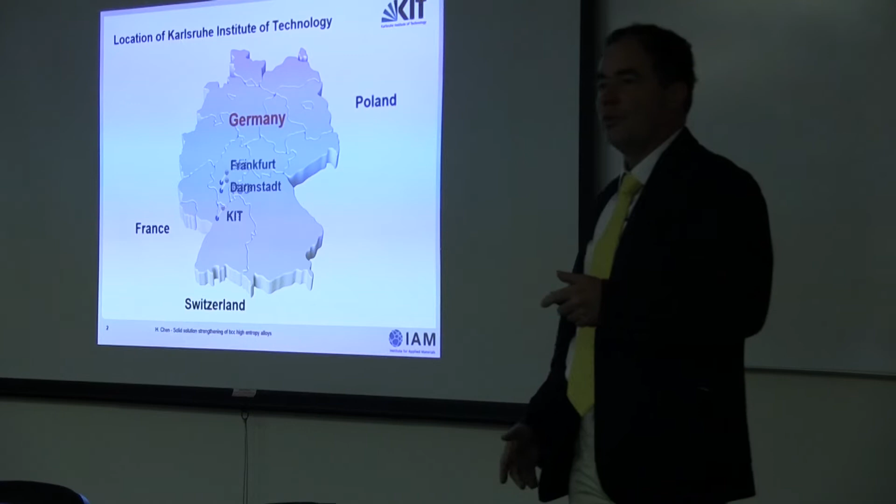Karlsruhe as a city has a population of about 250,000, or maybe 300,000 at most, depending on how you count it. So it's certainly much smaller than Ciudad Juárez here.

Now, Karlsruhe, KIT - Karlsruhe Institute of Technology - we did not carry this name until about 15 years ago, because we were formerly separate institutions: a university on one side, which is located downtown in the city. This is Karlsruhe.

And actually the castle is just on the edge here, on the edge of the campus. So if you once have the chance to come to Karlsruhe and stay overnight in the Gastdozentenhaus, the guest house for the scientific staff, you can have an easy walk to the castle, only about 200 meters away. It's very green and refreshing, a very quiet place. But on the other hand, you have the downtown area close by, also within walking distance.

And apart from that, we have a second institution which was independent of the university, the so-called Helmholtz Center. This was also briefly addressed. The Helmholtz Center, as you can see, is not far away, only 12 kilometers, but it's located in the woods. This has a simple reason.

About 30 years ago, Germany was still very much into nuclear power research, nuclear fission and nuclear fusion research. This was top secret at that time, which meant a research institute devoted to fission and fusion research had to be placed in some remote place where not much population is around. Meanwhile, this has changed, so you can just enter this site as well, like Manuel did many times, showing his passport, and then you get easy access.

Our total budget a couple of years ago was 861 million. This is very important. The funding is actually distributed into 3 big parts. The first part is from the federal government, which funds the Helmholtz Center - 30% of the 860 million, you can calculate this number, is only for research in a research institute.

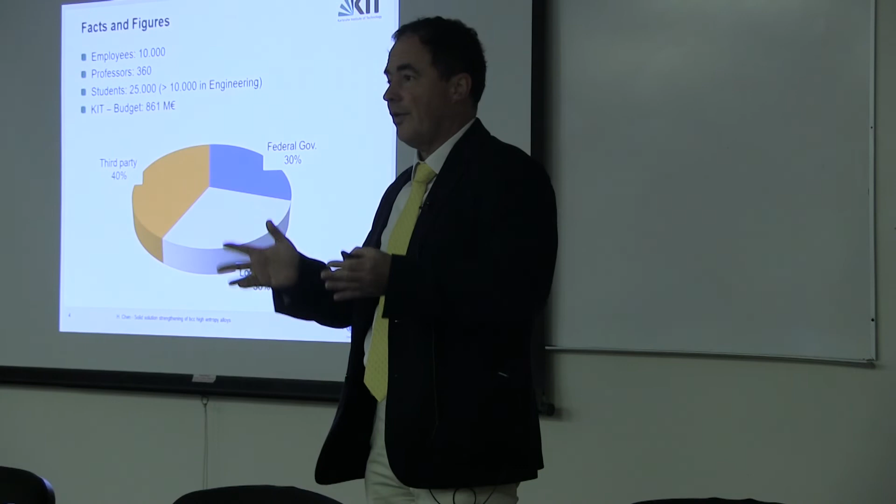Another 30% is for the university - this comes from the local state. In Germany, like in Mexico, all universities are funded by the local states, not the federal government. Both team up and add to this by raising third-party funding from various sources, industry as well as national science foundations, and these assume about 40% - quite a bit of a fraction of the total budget comes from third-party funding. That's why I think we are strong in fundamental as well as applied research.

And now coming to my talk itself. What is the motivation? This can be best described by this little sketch, showing the specific core power of a turbine engine. I'm working in high temperature structural materials, as the title suggests. This is the specific core power over the turbine inlet temperature. What you see here are dots representing certain metallic materials used at certain times of development, like in the 50s, 60s, 70s, and so on.

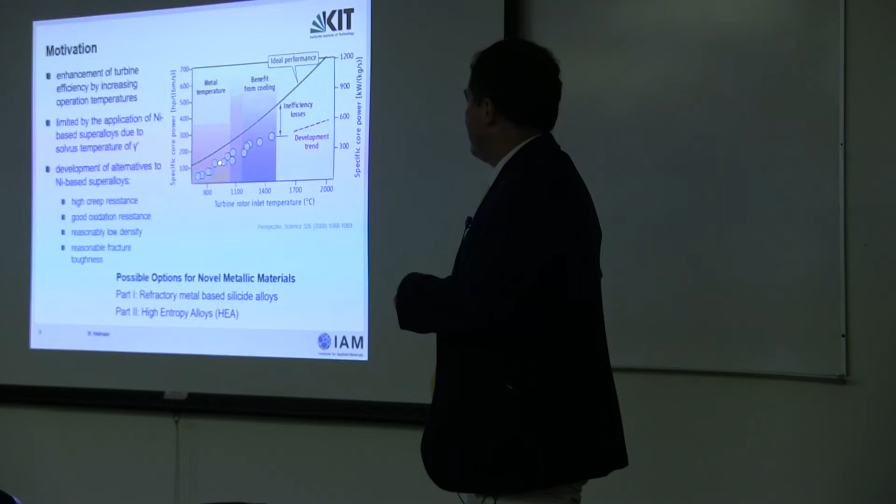What you can see is a demand for increasing the turbine inlet temperature by developing more advanced materials. But you can also see that we never reach the ideal performance, which some of you may know from textbook thermodynamics - this is the thermodynamic curve for a combustion engine. In fact, we observe that we don't get even closer to that gap; the gap actually opens, simply due to inefficiency losses - heat is wasted somewhere, and so on. No engine, as you know, we do not have perpetuum mobiles.

No engine works at 100% efficiency. The question is, how high is the efficiency, and how can we increase it? The development trend suggests that these inefficiency losses become greater as temperature increases.

This is simply due to one fact: the alloys we currently use, the nickel-based alloys, are limited by the Solvus temperature of the strengthening phase gamma prime, meaning we reach the maximum operation temperature of these alloys. We need to develop new materials, alternatives to nickel-based superalloys, with a much higher melting point.

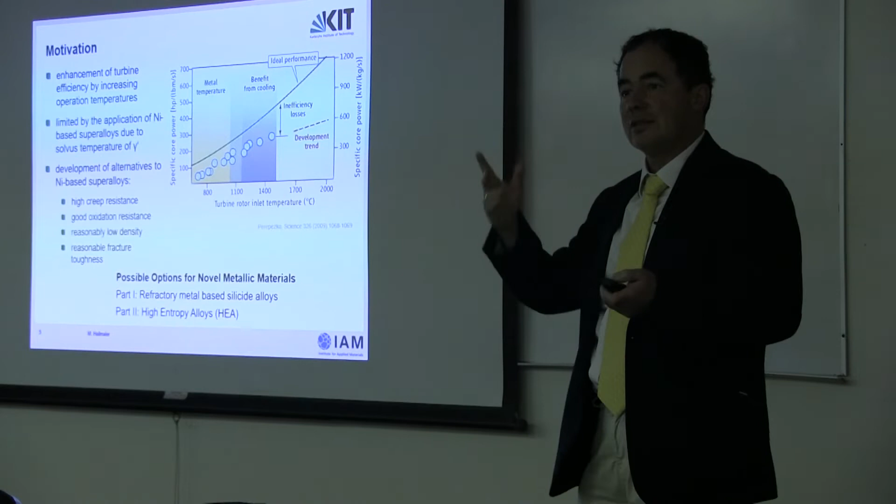In this Boeing 787 there's a really novel and the most innovative material in the aero engine, called titanium aluminides, a low weight material with a density of less than 4 grams per cubic centimeter, with a specific strength which exceeds that of nickel-based superalloys by a factor of 2 at best. Obviously, I arrived here safely, so this worked, right?

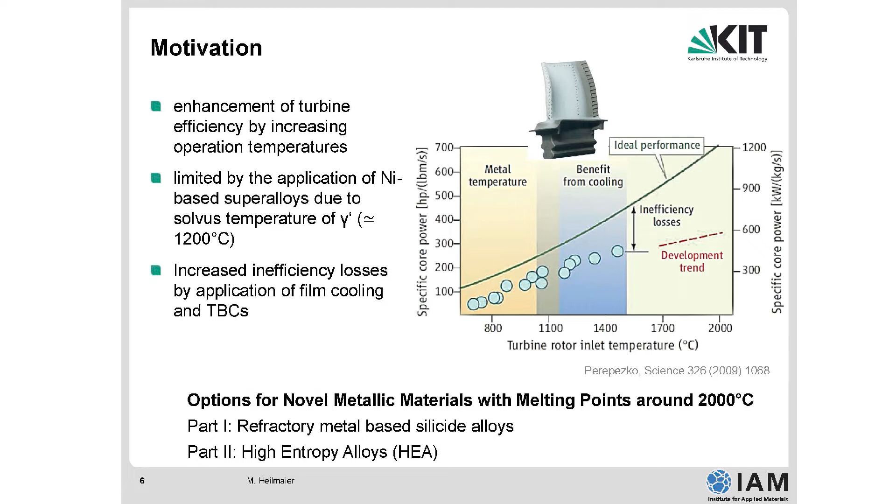And we now try to develop new options for these metallic materials with higher melting points than superalloys. I have split my presentation into 2 parts. The first part will focus on refractory metal silicide alloys. The second part on what we call high entropy alloys, a really novel research branch which hasn't been discovered until 10 years ago. Before I go into this, I will show you one slide on why nickel-based single crystal alloys are so good.

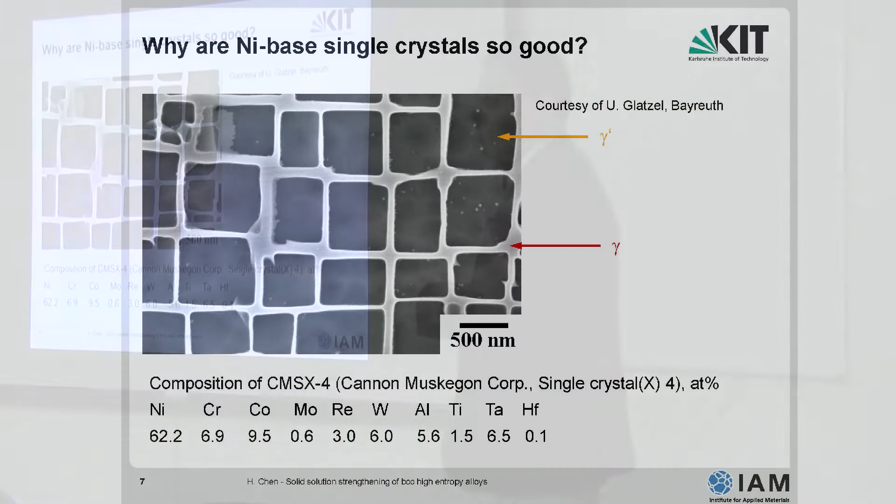And this is the answer to it. This is the micrograph, a TEM, transmission electron micrograph, of a nickel-based single crystalline alloy called CMSX4. CMSX4 stands for Cannon Muskegon Corporation Single Crystal number 4. They developed a series of alloy compositions—some were successful, some were not. The number 4 alloy with this chemical composition was extremely successful, and it now represents the state-of-the-art material in the hottest section of an aero engine.

Those of you who fly, no matter what kind of airline, no matter what kind of aero engine made by different manufacturers like General Electric, Rolls-Royce, Pratt & Whitney, to mention a few, will use significantly similar materials nowadays in the hottest section. But their strength is limited and kept up by this phase, which is called the gamma prime phase.

It's an ordered intermetallic phase embedded into a matrix of a disordered solid solution. Disordered solid solution means, for those who are not material scientists, that the atoms in the alloy are randomly placed on the lattice sites. There are no specific locations for specific atoms, which is different for the gamma prime phase.

Here you have 2 different atomic sites which are occupied by 2 different atoms. There's one site mainly occupied by nickel and chromium, and the other site mainly occupied by aluminum and titanium. I don't want to stress your knowledge on materials too much, so I'll leave it as it is now.

But I want to say one more thing about all these other chemical elements which have a definite task to fulfill. For example, molybdenum, rhenium, and tungsten are heavy elements, big atoms, and they strengthen the matrix—this little fine white area here—by solid solution strengthening. I will come back to that in part 2 of my lecture, for the high entropy alloys.

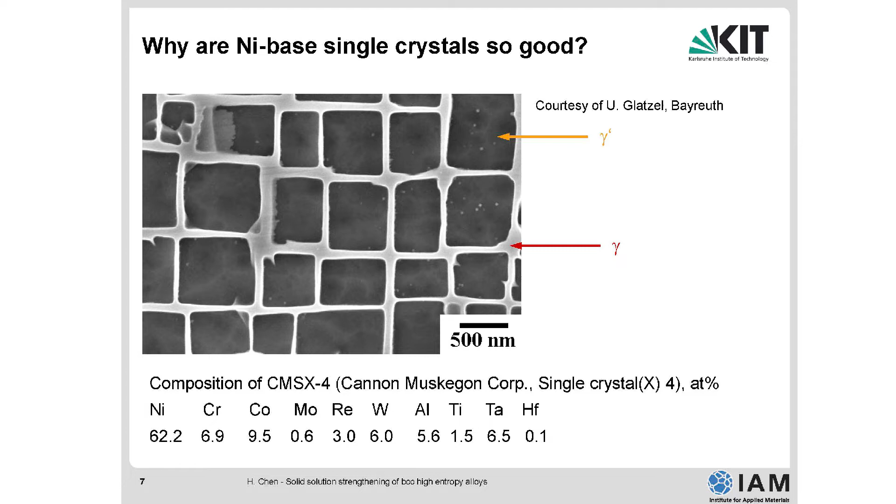So, keeping in mind, the take-home message here is: if this strengthening phase, the gamma prime phase, is gone, if it is dissolved at temperatures beyond, say roughly, 1200 degrees C, this material is no longer strong. It's weak, and therefore it cannot be used. If you want to go to higher temperatures to increase efficiency, you cannot make use of this alloy anymore. You need new alloys—that's the reason why I'm looking into alternatives to it.

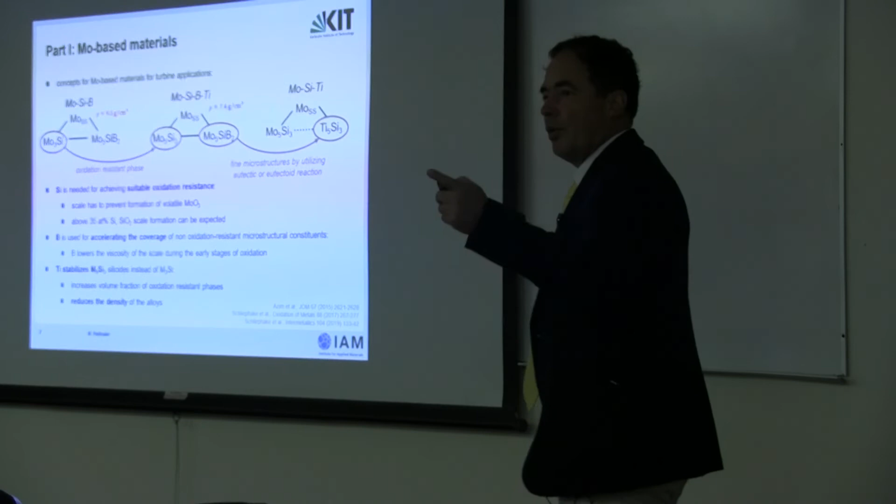So I'm coming to the first part. I apologize for the small letters here—you probably cannot read it in the back, but I'll just draw your attention to the most important issues. So what are the most important issues? First of all, these alloys have a high melting point. Molybdenum has a melting point as a pure element of over 2,600 degrees Celsius.

Having just said that nickel-based alloys have a temperature limit of 1,200 degrees Celsius, roughly speaking, this is much higher. Now, a pure molybdenum-based material would not work in a high-temperature environment because of the following issue. You need suitable oxidation resistance. If you don't have chemical elements in the alloy which provide oxidation resistance, the alloy would oxidize rapidly. You would form, in particular in this case, a volatile molybdenum trioxide which just sublimates and goes away. So you form smoke of molybdenum oxide which rapidly evaporates.

You need silicon to avoid this, but you need a high amount of silicon, above 35 atomic % silicon, to get a silica scale formation here, which is a lot. So we try to avoid this because this material becomes extremely brittle. What else could you do? You could add other elements to alleviate the fact that you need high silicon contents. For example, you could add boron. Boron is used for accelerating the coverage of the non-oxidation resistant microstructural constituents. Boron lowers the viscosity of the oxide scale which forms and thus provides rapid oxidation protection.

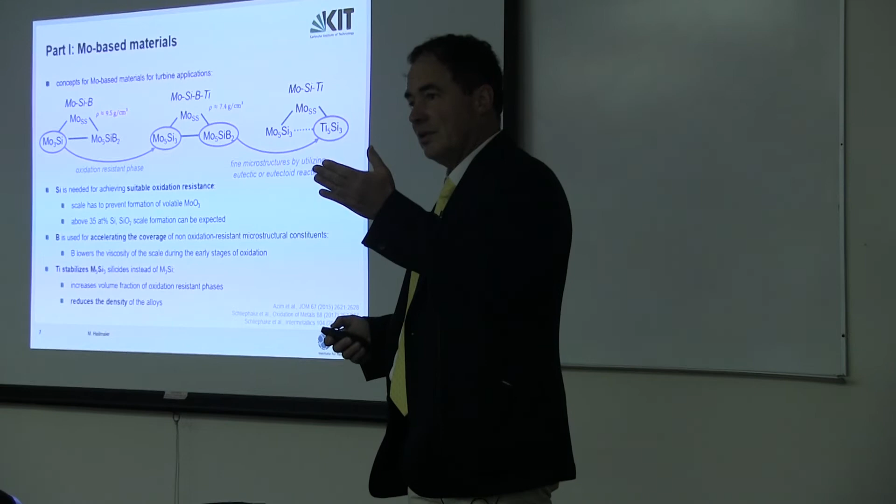But now there is a drawback here, again a small number. Rho, the specific density of the alloy, mass divided by volume, is 9.5 grams per cubic centimeter. This is beyond the density of nickel-based alloys, which roughly have a density of 8 grams per cubic centimeter. So you need to make the alloy lighter. This can be done by titanium, for example. Titanium addition also changes the phase formation somehow, but you can avoid this by playing around with the phase diagram. I don't show this slide here. But at the end, the density is down to 7.4, lower than nickel-based superalloys. So we have an alloy with potentially higher oxidation and creep resistance, mechanical strength at high temperature, but a lower density.

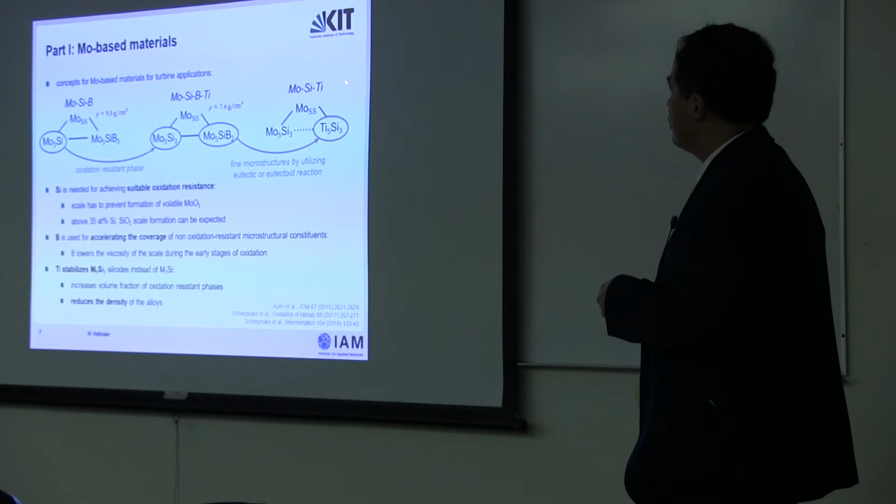Now you could ask yourself, why do you need the boron at all? This is what I will show you in the next few slides on this first part. Namely, you can still achieve good properties with a simple ternary alloy consisting of molybdenum, silicon, and titanium. The titanium, if you don't use the boron, stabilizes a different phase than this one here. This one is an oxidation-resistant phase, and it was an unsolved question in science whether this Ti5Si3 is good or not in the alloy. If you synthesize a pure Ti5Si3 phase, it would oxidize rapidly at temperatures beyond 1000 degrees. I will show you that this is surprisingly not the case for the alloy of interest here.

Okay, I have to bother you with one phase diagram at least. Maybe you see a second one. This is a melt projection of the ternary phase diagram between molybdenum, silicon, and titanium. When you look at the melt surface from the top, from very high temperatures, you see different lines here, which reflect reaction pathways in the alloy. We picked out two of the interesting ones. We don't want to go into very high silicon contents or low titanium and molybdenum contents, so we are interested in this part here. The green part gives you a eutectic reaction. Everybody should know what a eutectic reaction is.

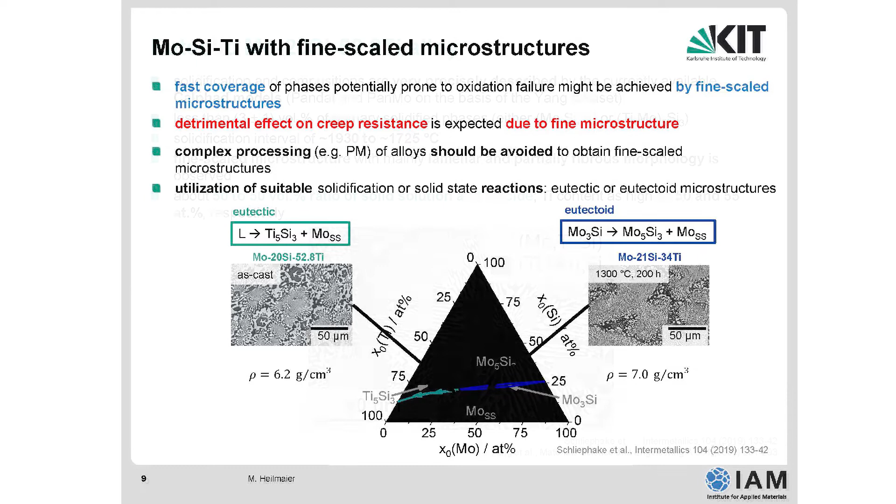Okay. So here in a larger magnification, the fine-scaled eutectic microstructure. This is the alloy composition. Those of you who have looked carefully would see all of a sudden, this is in atomic percent; all the concentrations I give are in atomic percent. If you would now calculate the molybdenum content, you would say, this is only about 30% molybdenum. Is this still considered a molybdenum alloy, or is it rather already a titanium alloy?

In terms of atomic numbers, it's a titanium alloy. In terms of weight, if I would calculate weight percent, it would be still a molybdenum alloy. And since we are doing casting, you know, all the metallurgical engineers talk in weight percent and not in atomic percent. So we can still say this is a molybdenum-based alloy.

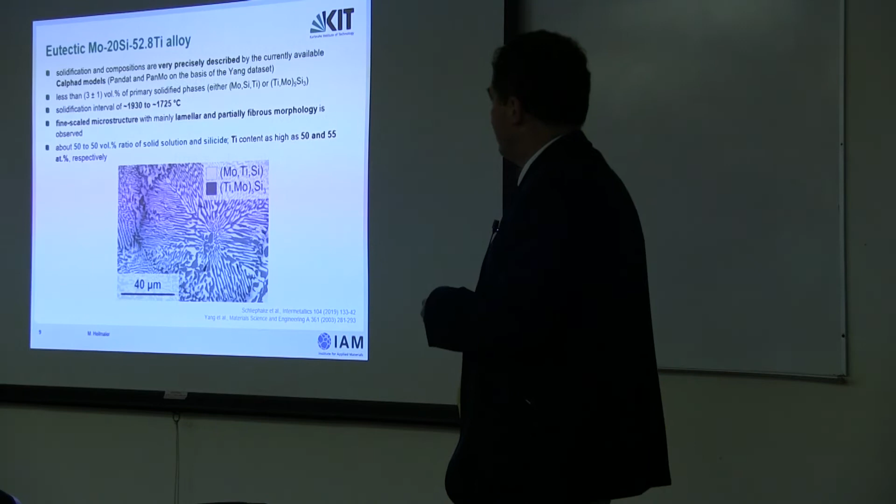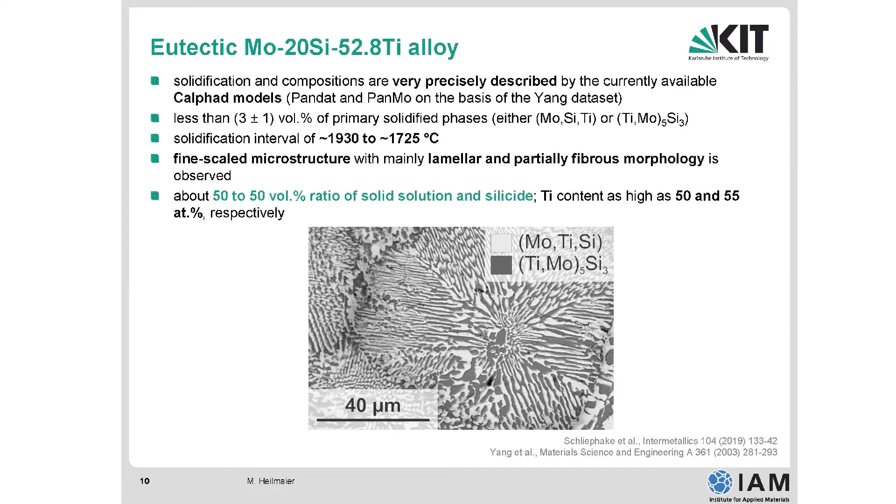And of course, the dark phase we determined by EDX and other methods is Ti5Si3 together with some molybdenum, which assumes titanium sites in the crystal structure. And the light phase is mostly molybdenum plus some titanium and silicon. Okay, so for the moment, keep that in mind. We have a very fine-scaled microstructure, and the question is, how does this fine-scaled microstructure perform at elevated temperatures with respect to creep and with respect to oxidation resistance?

Compared to that, the eutectoid alloy, you can see, has a much higher molybdenum content. Here, silicon plus titanium together is about 55, so that means 45 atomic percent is still molybdenum. And I said previously, at the beginning, this is the as-cast microstructure. The as-cast microstructure did not fully decompose into the thermodynamically stable phases. That's why we needed this 1300 degrees Celsius heat treatment.

Here you see this light gray phase. This is still Mo3Si, and you need to decompose this into the stable phases, the molybdenum solid solution and the Mo5Si3 phase, which has been done here. Of course, you note that there is some residual phase left, Ti5Si3 here, the very dark phase, but this is only to a minor content, 5.2.

Maybe we should not do the update here at the moment. Yeah, I wait. Yeah, don't worry.

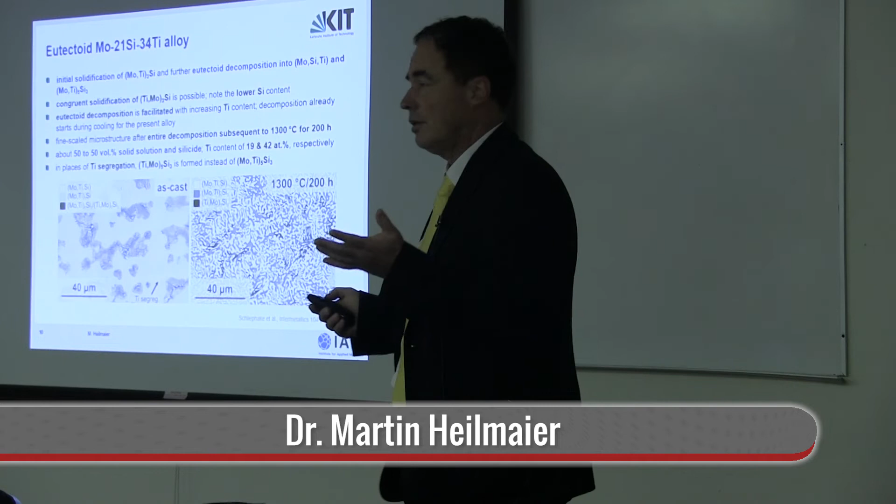Okay. So what you also can see here is that we have a mixture of about 50 to 50 volume% solid solution and silicide. So this material is a kind of a microcomposite, if you wish. Okay? Now, first I talk about oxidation, then I talk about creep. Oxidation is a major issue for these alloys because assume you have a metallic material, you put it in a furnace, and then you let it oxidize. The furnace operates like an aero engine without the rotational centrifugal forces.

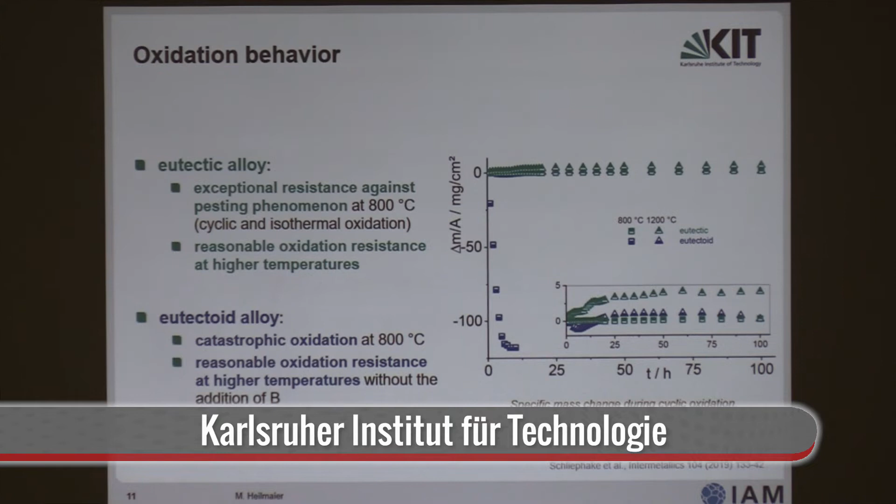So the metal is transformed into oxide. If all the metal is eaten up by forming oxides, you have a brittle material and your engine fails. So this should not occur. What this means is when I put this alloy in a furnace, and I have shown you two different temperatures: square is always 800, the green color is the eutectic alloy, the blue color is the eutectoid alloy. I have shown two different temperatures, 800 degrees Celsius and 1200 degrees Celsius.

And what you see here, the green alloy, the eutectic alloy, does not change its weight. Here is plotted the weight per surface area, delta M over A in milligrams per square centimeter. If the weight does not change, this is an indication for a very slow oxide formation at these temperatures, right? However, compared to that, here you see three curves plotted. Well, the third curve you cannot see because it's the eutectoid curve at 1200.

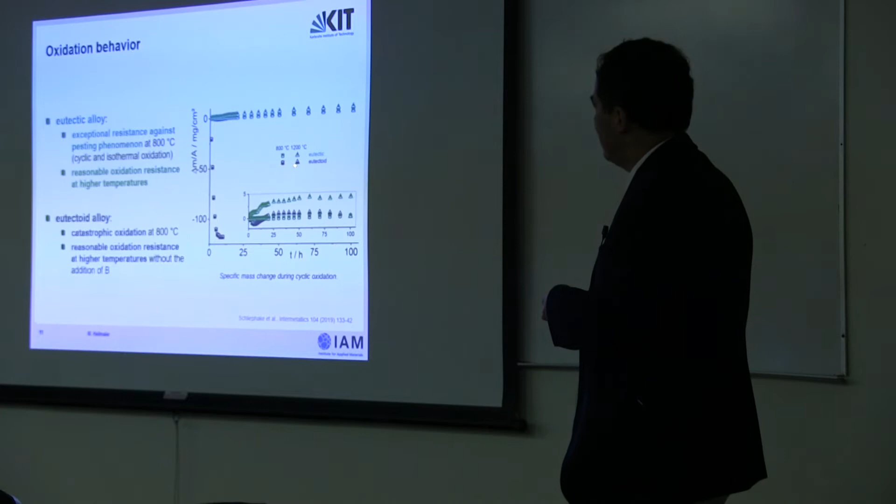It's actually underneath the other two, the eutectic alloy at 800 and 1200 degrees C. Basically what you see here, after 100 hours, not much has changed for the two temperatures of interest, and also for intermediate temperatures. But what you see is for the eutectoid alloy, this one here, the half-filled square symbols, this goes down rapidly, ending up down here with a dramatic weight loss.

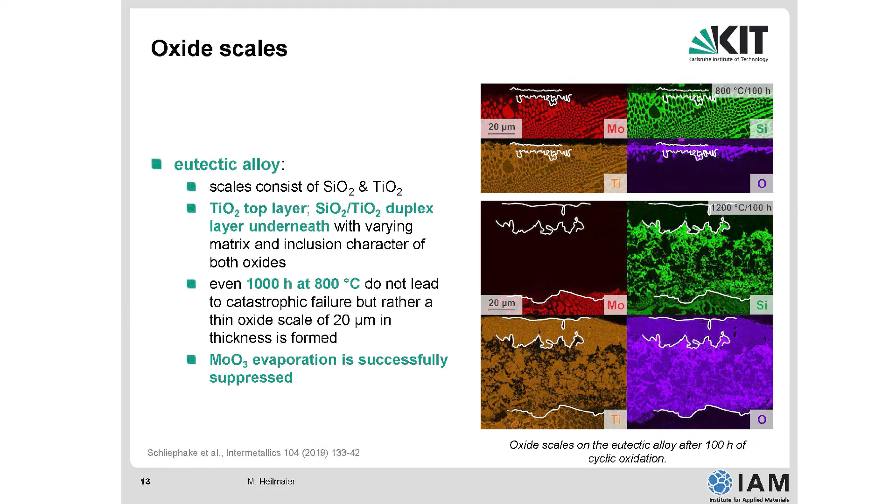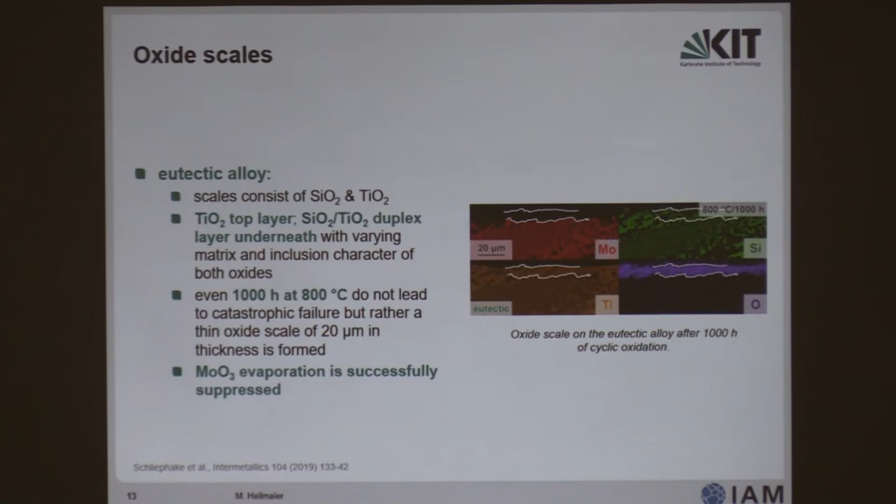Of course, you can also look at the 800 degrees Celsius oxide scale. It shows, again, protectiveness by forming these duplex scale layers. I don't want to go too much into detail. If you have any questions, I would be happy to answer them afterwards. Let me show you instead the creep behavior for these two alloys. And now, as always, a metal has two sides, right? On one side, it's shiny. On the other side, it's not so nice. The drawback of this eutectic alloy comes with the creep behavior.

And we plotted this on a log-log scale. So strain rate plotted versus stress means we want to have the material being down here on the right lower end. Right? So you can see that the blue curve, the eutectoid alloy, performs much better than the green curve, the eutectic alloy. And you can understand why this is the case.

Because in the green alloy, the Ti5Si3 intermetallic phase is the major phase, and the green alloy obviously performs similar to the monolithic intermetallic compound Ti5Si3. Whereas in the blue alloy, the molybdenum solid solution or the Mo5Si3 are the constituents of this alloy, and as you can see here, the blue alloy shows exactly the same creep behavior as the molybdenum and the Mo5Si3. So you can understand why one alloy is superior to the other. And that's the main issue of this slide here.

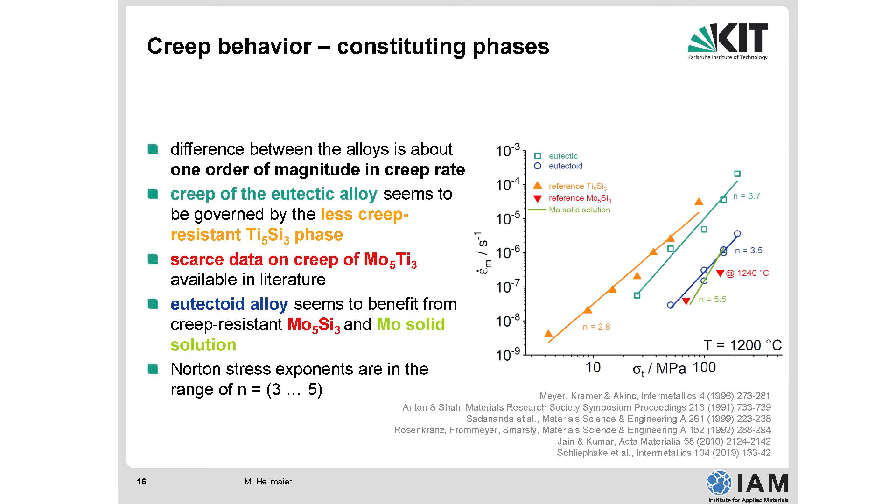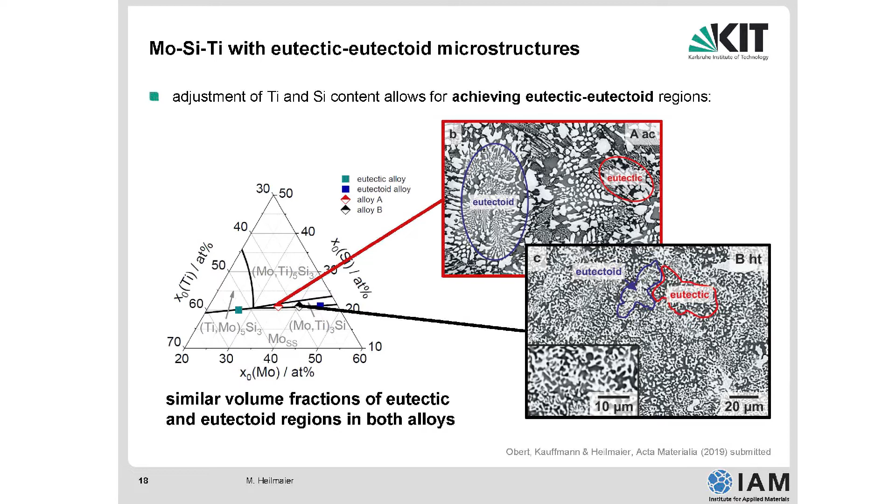Now you can stretch this a little further. I will keep that story short because I want to continue with my second part. You can, of course, walk along this decomposition line. Here you have got the eutectic alloy. Here is the eutectoid alloy. And I told you the eutectoid alloy would be stronger but not oxidation resistant. This is weaker but oxidation resistant. So maybe we can make a compromise and locate ourselves with alloy A and B in red and black somewhere in the middle between the eutectic decomposition and the eutectoid decomposition. And of course then the microstructure is composed of eutectoid regions and eutectic regions. I don't want to stretch these details here.

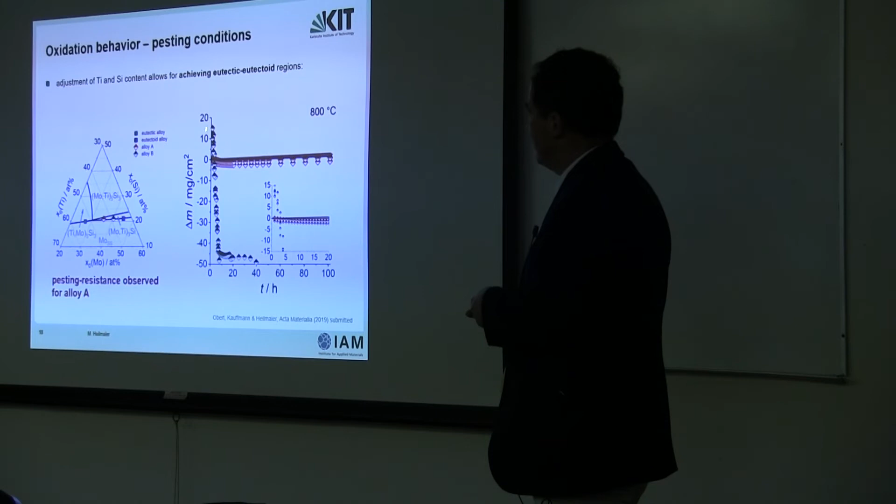Now let's look at the oxidation data again, because this is the initial proof. We want a non-pesting oxidation-resistant alloy. And to our surprise, we can afford some eutectoid regions still. This alloy here, alloy A, does not show pesting at 800 C. It still shows no weight change here, but the alloy with too many eutectoid areas in the microstructure does show pesting again. And the same behavior as previously was shown for 1200 C. We do not see any noticeable weight changes. These are all small numbers here. So the material is quite oxidation resistant at the highest temperatures.

But you can imagine a turbine has to be ramped up and cooled down. So you have to go through the 800 degrees centigrade region sooner or later with your alloy. So it doesn't help you having an alloy being oxidation resistant at 1200 C. At 800 it must show at least some oxidation resistance, because during start and landing the alloy will see this temperature. Okay, I skipped that for sake of simplicity.

We have done a simulation of how oxidation protection works in detail with the titania and the silica, and I do not want to go into detail, but believe me, this is just under revision in Acta Materialia. We provided a model for explaining why one material is oxidation resistant and the other is not.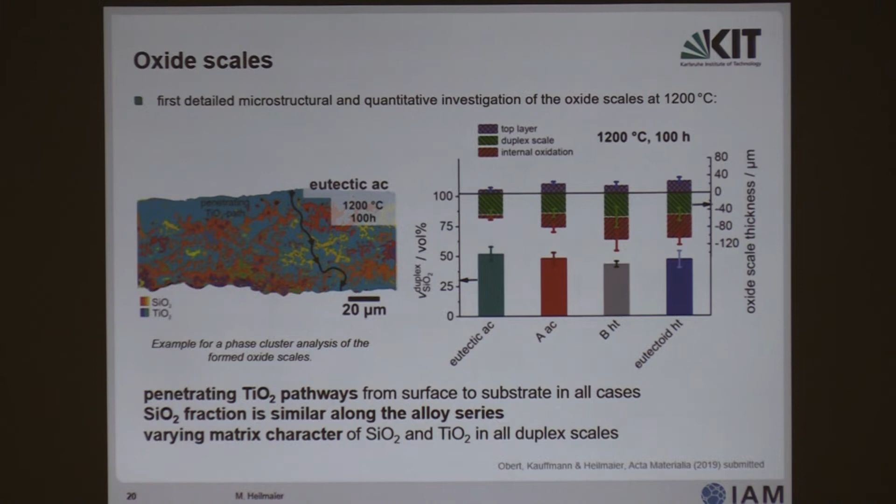I just want to skip these slides for the sake of time, and would like to address another point before I come to the second part of my lecture, namely, how can we explain the different creep behaviors in a more quantitative way for the eutectoid alloy, the eutectic alloy, and the new alloy A. So first of all, the new alloy A, as you can see, which is still oxidation resistant but contains eutectoid regions, shows a better creep performance than the eutectic alloy.

The reason why this is the case is very simple, because the melting points of all these alloys are different. The melting point of the eutectic alloy is lower than the melting point of the eutectoid alloy. And when I say melting point, I mean the point where the first phase starts to melt.

You know, of course, this is a melting range where the alloys start to melt. The melting point, in my definition, is the temperature where the first phase starts to melt. So we operate these alloys at different, what we call homologous temperatures. Homologous temperature is a normalized temperature, the actual temperature divided by the melting point. And of course, the comparison is only fair when you compare the alloys at homologous temperatures which are equal.

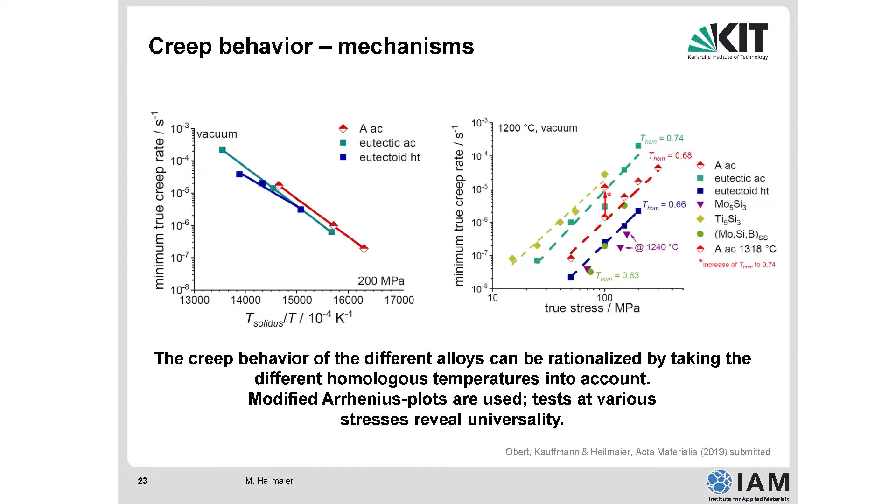Actually, the red alloy falls exactly on the line of the green eutectic alloy, meaning by definition the creep resistance is not different if you compare it in a physically related way, meaning at same normalized temperatures. The creep resistance, of course, is better when you let an alloy creep deform at a low absolute temperature with a high melting point.

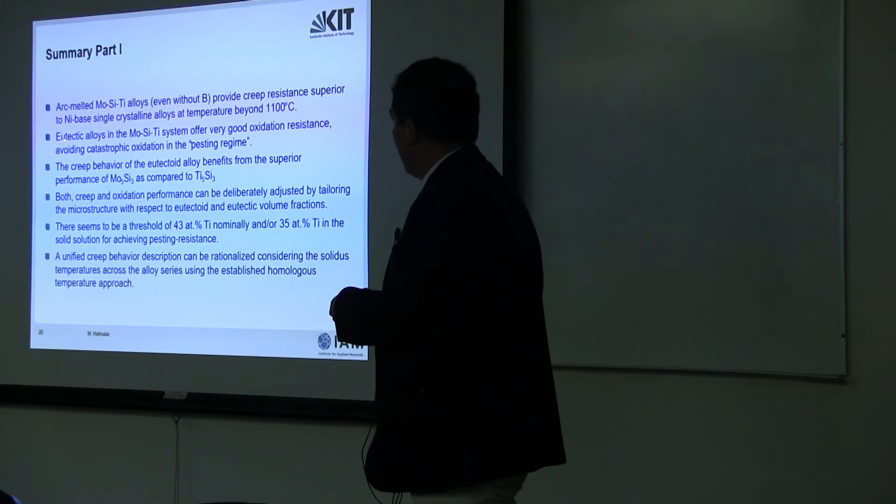Okay, so summary of part one. We did arc melting, so this is a simple process. We have polycrystals, no single crystals, like in the case of nickel-based superalloys. Nobody knows what happens when we try to melt single crystals, but polycrystals are simply arc melted. With or without boron, they provide creep resistance superior to nickel-based single crystalline alloys at temperatures beyond 1100 degrees Celsius. The eutectic alloys offer very good oxidation resistance. They avoid catastrophic oxidation in the pesting regime.

The creep behavior of the eutectoid alloy benefits from the superior performance of the Mo5Si3 phase as compared to Ti5Si3. And both creep and oxidation resistance can be deliberately adjusted depending on the alloy composition if I walk along the transformation line between eutectic decomposition and eutectoid decomposition. There seems to be a threshold, I didn't show this in detail, of 43 atomic percent nominally or 35 atomic percent in the solid solution for achieving pest resistance. You need a minimum titanium content to avoid pesting.

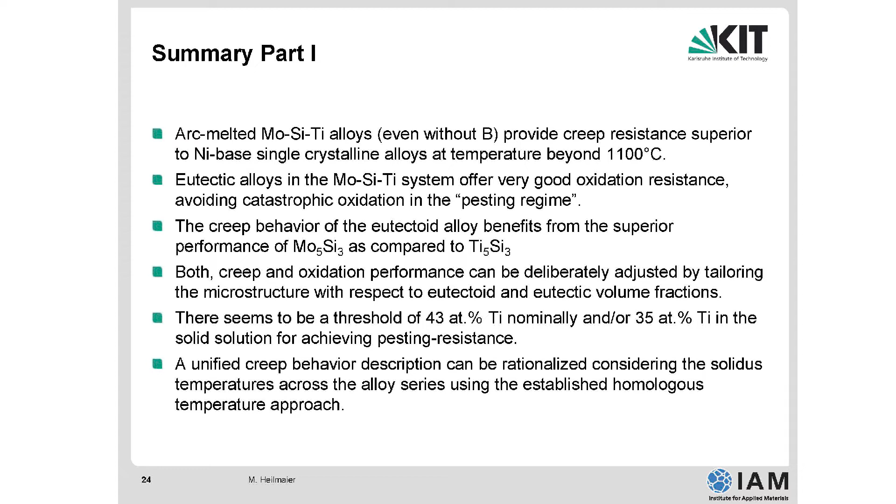That's what it says. And finally, you can describe the creep behavior by a unique and simple approach which relates the actual creep testing temperature to the melting point of the alloys. And this is the so-called homologous temperature approach.

Part 2, high entropy alloys. The concept, which is just a concept, this is not a theory, is very simple. The concept is that we get an increasing entropy contribution to the free enthalpy, delta G, for stabilizing disordered solid solutions with simple crystal structures if we increase this mixing entropy. So this is a basic thermodynamic principle. Free enthalpy G is enthalpy H minus temperature times entropy S.

Yeah? And the mixing entropy can be influenced strongly by what we call the so-called configurational entropy. Configurational entropy means taking different atoms in different concentrations and putting them randomly on lattice sites in the crystal. And this is the simple formula. I don't need to explain it. So the configurational entropy actually scales with the Boltzmann constant and with the number of alloying elements, right?

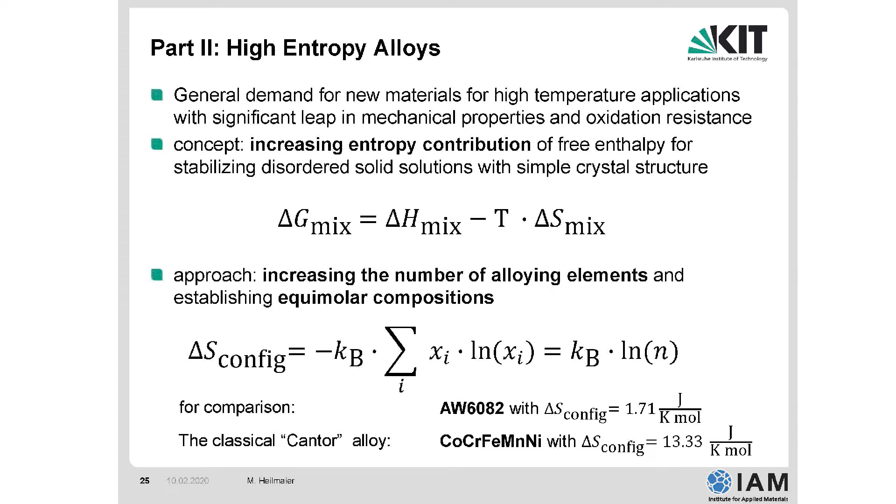So just a simple comparison, a classical aluminum alloy 6082, as some of you may know, has a configurational entropy of 1.7 joule per Kelvin mole. And what we call the classical Cantor alloy, this is a 5-component alloy in equal compositions, chromium, cobalt, iron, manganese, nickel, has a configurational entropy of 13 joule per Kelvin mole instead of 1.7, so a factor of 10 higher. Now let's see how this concept works.

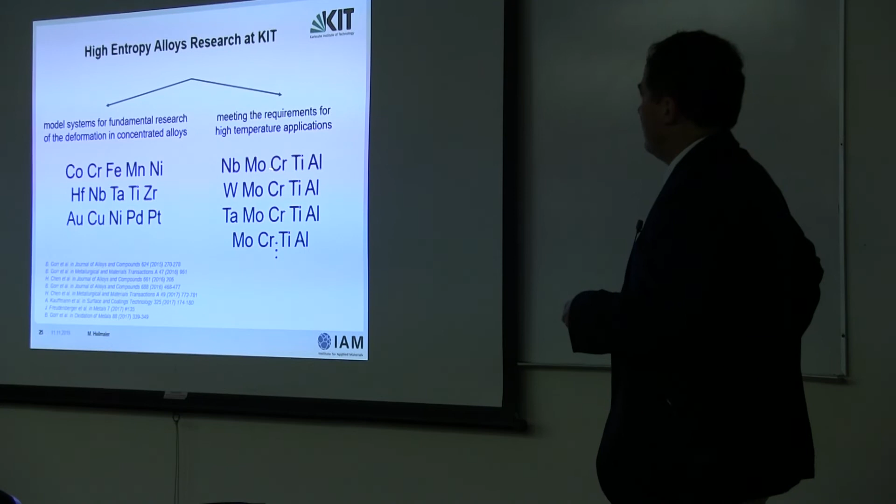So what we do at KIT is a number of different alloys. We have fundamental systems on this side. On this side, this is a face-centered cubic solid solution. This alloy is a body-centered cubic solid solution. This is a noble metal alloy, face-centered cubic solid solution. And this is some high-temperature alloys. You see all of a sudden here, again, the refractory metals show up again. Tungsten, molybdenum, tantalum, and so on. So I will look into this. I don't talk about this.

How much time do I have left? 15 minutes? Is that okay? Yeah? I can speed up a little bit if you want.

So the uniqueness of this approach is that we are not in the corners of a phase diagram. We are rather in the center of a phase diagram.

If you go into a corner of a phase diagram, then you have the classical alloys, like steel, where the major alloying element is iron, and you add a little bit of carbon, manganese, and so on. Here the approach is different: we are in the center of a ternary, or rather quasi-ternary, phase diagram.

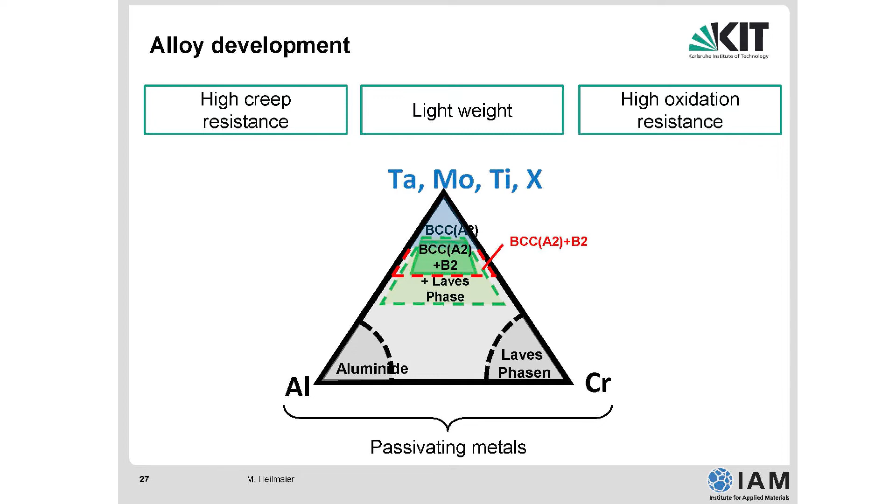Here we deliberately go into the middle and try to stabilize a solid solution, a single-phase solid solution. We are aiming for high creep resistance, lightweight, and high oxidation resistance. For high oxidation resistance, we go for the passivating elements aluminum and chromium, so we form an alumina or chromia scale which is oxidation protective. These alloys are for high temperature creep strength.

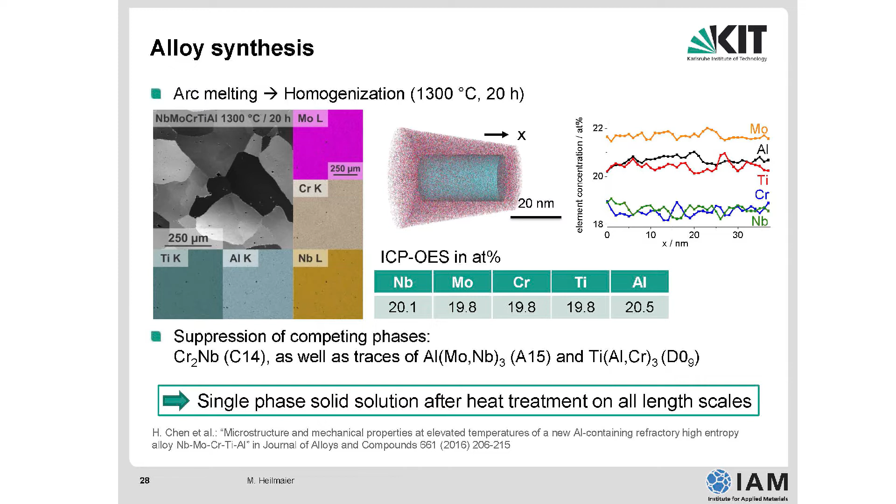So how do we do it? Again, arc melting, quite simple. Then homogenization treatment, and then we have to check the chemical homogeneity on various length scales. For example, overall chemical composition by ICP-OES indicates that the chemical composition is quite well met here for this quinary alloy system.

But we also check chemical composition on an atomic length scale, and this is what Manuel did with us, not in this case but in another case. This is atom probe tomography. Here you see the scale, 20 nanometers, and when you do the chemical analysis, you see that the elemental concentration is quite constant. It's a bit further away from each other than here, but it still scatters around 20 atomic percent. By doing so, we get a single-phase microstructure.

By suppressing the competing phases which are shown here.

What about the extended solid solution strengthening? Where does it come from? It comes from the fact that we mix on a random scale different atoms with different atomic sizes, and thereby we distort the lattice quite a bit. So lattice distortion is what counts in this system, in these concentrated systems, either BCC or FCC.

Of course, you have to measure the lattice distortion appropriately for predicting the solid solution strengthening. That's why we followed an experimental approach. We started from this model system, a 5-component system, and then deliberately varied either the niobium content—we took out niobium and ended up at the quaternary molybdenum, chromium, titanium, aluminum alloy—or on the other side we took out the chromium because we wanted to suppress this phase. The chromium-niobium phase is a Laves phase which is brittle and deteriorates the composition.

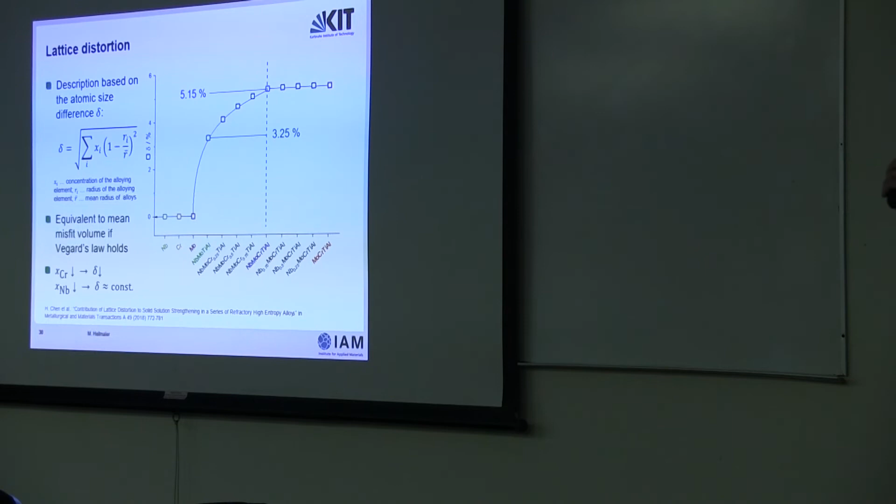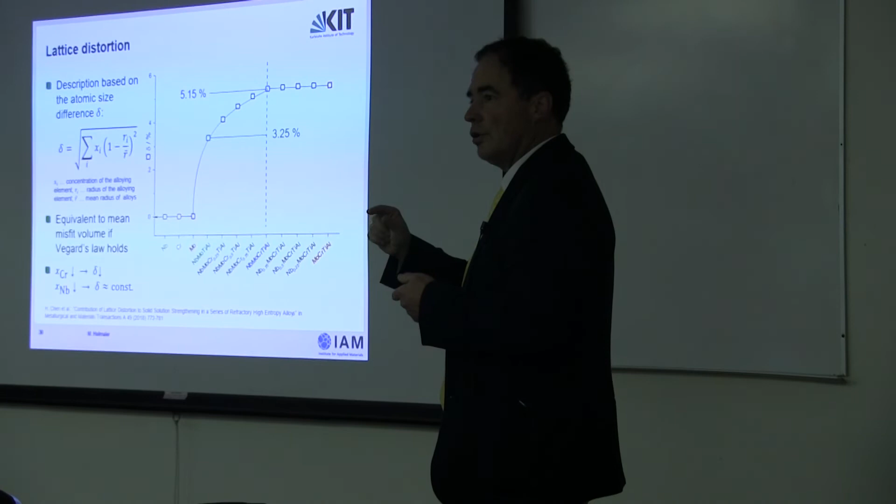So, just to give you a flavor of what we did—I don't want to go through the whole analysis—the atomic size difference is the measure for the lattice distortion. A high lattice distortion means I have atoms of largely different sizes in my solid solution. So the lattice distortion is proportional to the atomic size differences, and this can be simply calculated by this formula.

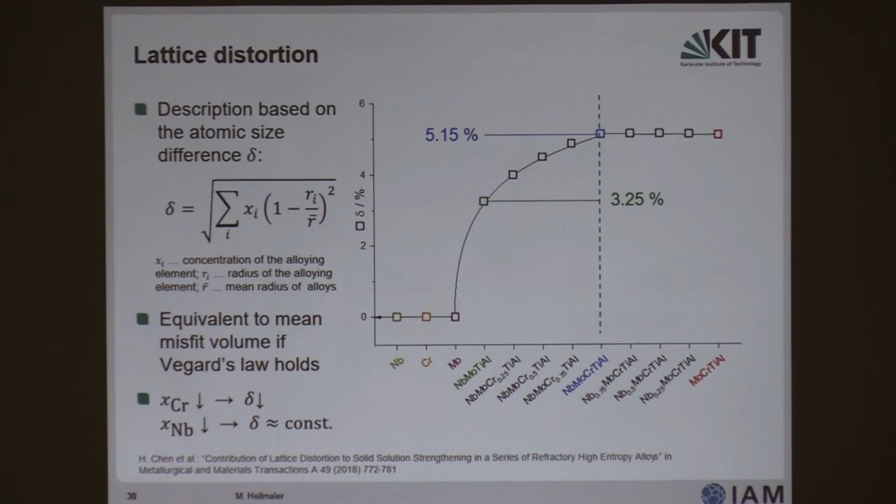Here is the average radius of the alloying element, and here is the mean radius for all the alloying elements in the alloy. This is simply summed up and then the square root is taken. What you see here is, of course, no lattice distortion in the pure elements, so this is 0. But the lattice distortion goes up quite a bit, up to 5%. 5% is a huge lattice distortion for a solid solution strengthened alloy. Imagine, for example, brass, copper-zinc, much lower, or aluminum-copper, much lower.

But we want to develop high-temperature alloys, so what about oxidation resistance? Here I've shown you mass change at 1100°C for these two alloys. The niobium alloy is not so promising, but the tantalum alloy—tantalum, molybdenum, chromium, titanium, aluminum—shows very low mass changes at 1100°C. So this should be of interest for further development.

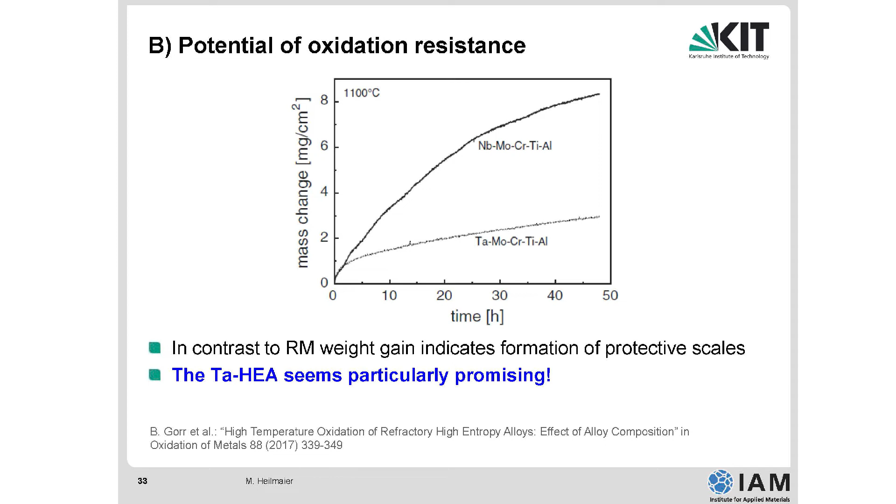First of all, you have to make the alloy with equiaxed coarse-grained grains. You should check again chemical composition and chemical homogeneity.

We have done this. I can skip this.

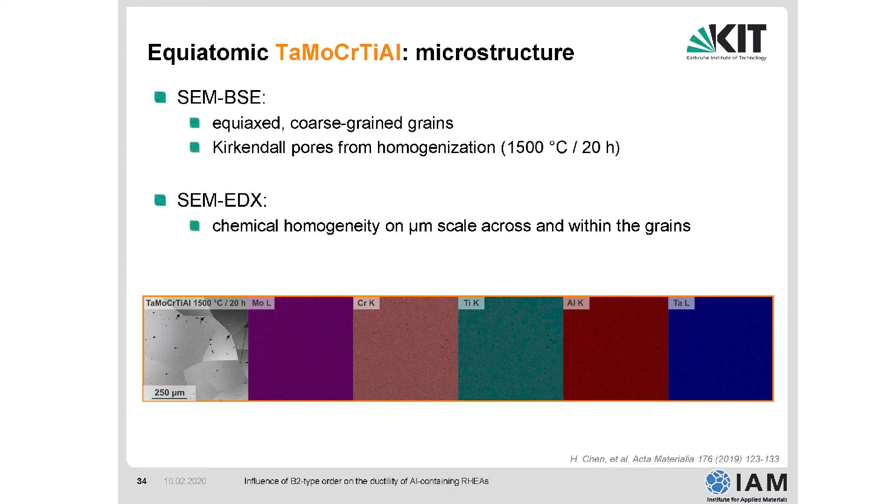Because of the tantalum and chromium inside, we do get a hexagonal Laves phase again. This is chromium-2-tantalum in this case, and you can see it here as nice little bright spots on the grain boundaries.

This brittle phase on a grain boundary is not good for structural materials, because if you want to plastically deform it, it would fail. I will show you an example for that in a minute.

Now, is this really an A2, meaning a disordered solid solution, A2 crystal structure? No, it's not. As you see here, you have tiny little reflections here and there. Here you have some indications of B2 structure.

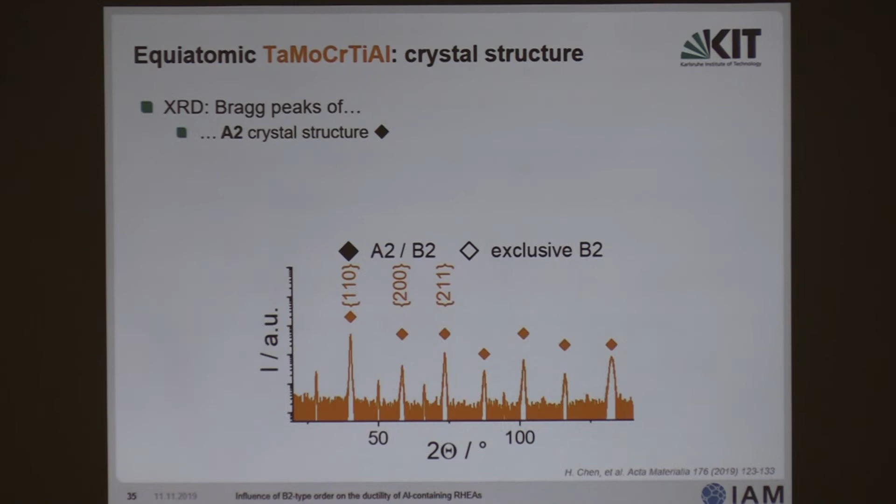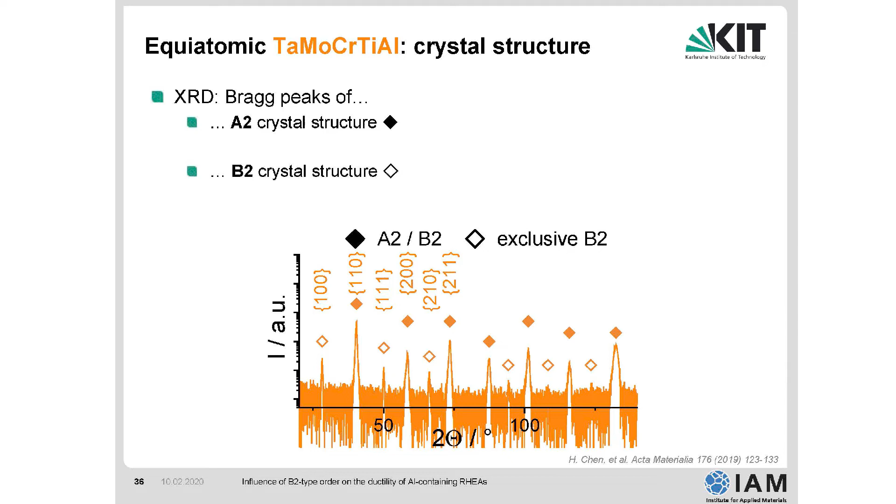So we do have B2 super lattice reflections, meaning we do not have random distribution of atoms, but some of the atoms take one atomic site and other atoms take another atomic site, preferentially.

So it's totally brittle below 1000 degrees C. The reason we guess is we have to avoid this Laves phase at the grain boundaries. I will show you briefly in the last 5 minutes how we tried to accomplish it.

So we started first with taking out the tantalum completely. No tantalum should mean no Laves phase, right? Because chromium-2-tantalum is the Laves phase. Again, this alloy is single phase.

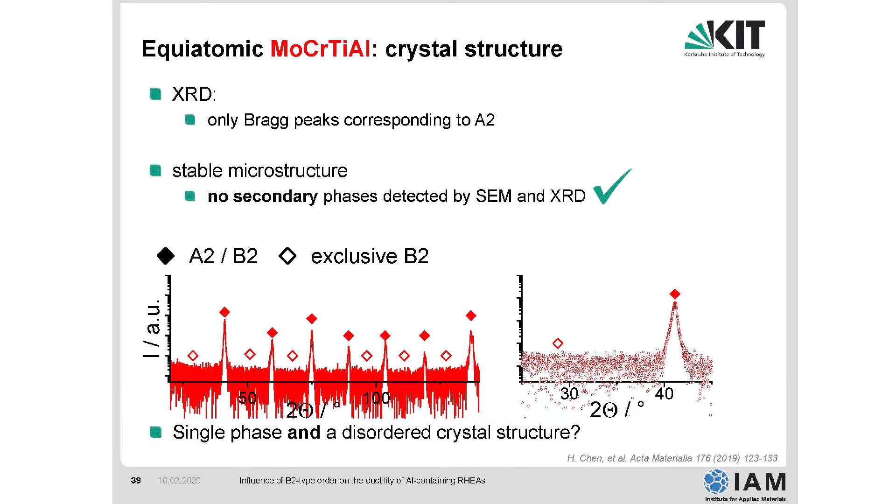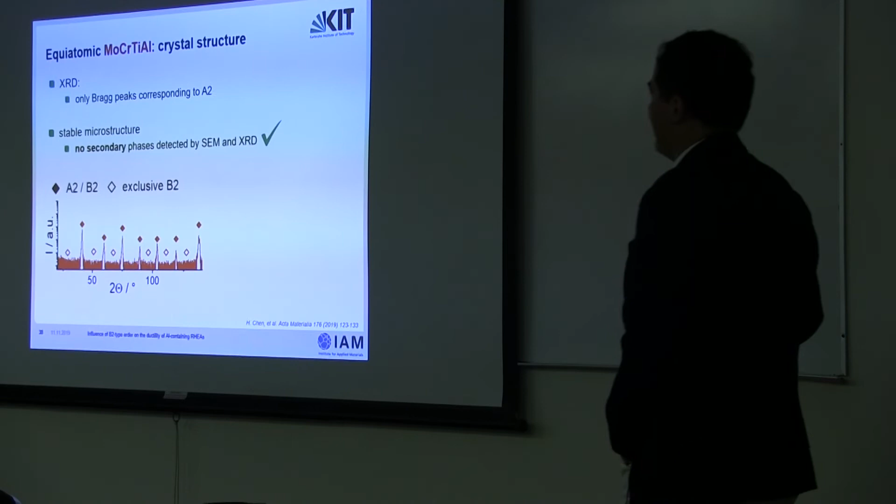Again, we have some tiny ordering superlattice reflections, but much less than in the other case. You can hardly see the superlattice reflection spots. There's not much left here in a magnified view.

But in SEM, in TEM, you can see it. This is a TEM selected area diffraction micrograph. You see gentle, really not very prominent superlattice spots. So there must be ordering, meaning there's no randomness again in the atomic site occupancy.

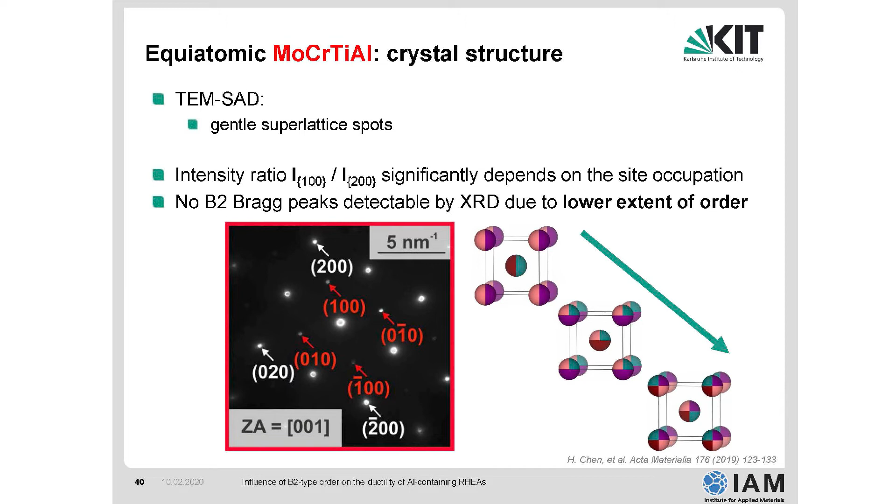It's preferred atomic site occupations. So this is the B2 structure, right? A center atom and simple cubic structure.

So the question you could now pose, is there an influence of B2 order? We did some calculations with a thermodynamic database to verify whether there is an A2 to B2 transformation at 1150 degrees Celsius. This is what it shows here. There should be the second order phase transformation at 1150 degrees Celsius.

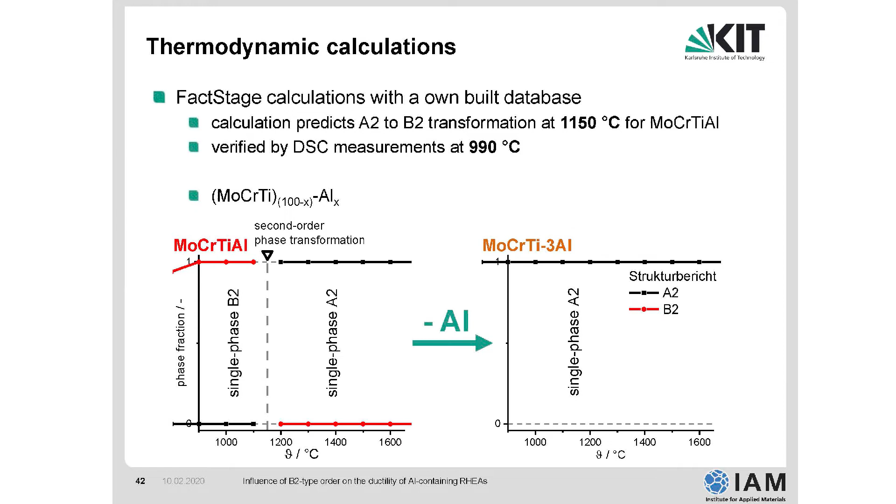So we expect B2 ordered structure to form, whereas if we reduce the aluminum content, it should be single phase all the way up to the melting point and all the way down to room temperature. So the final 2 slides I'm showing are on this alloy with the reduced aluminum content.

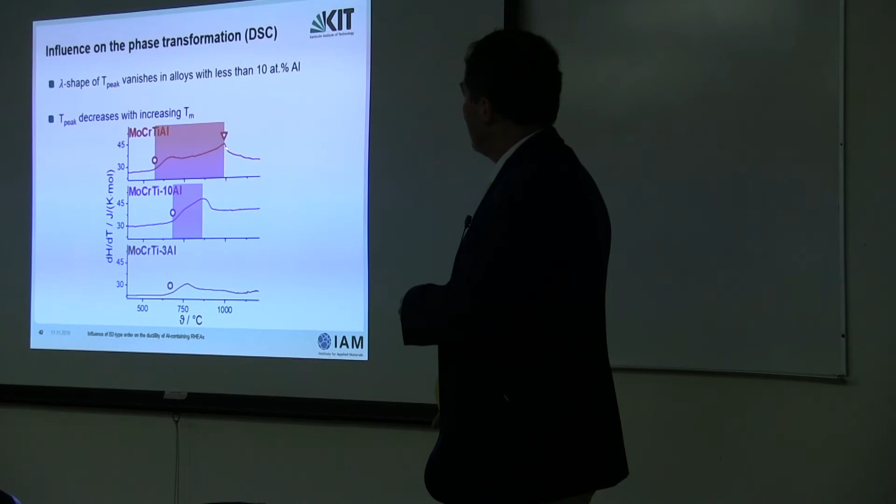This I skip. We can check this by another microstructural characterization method, whether we have an A2 to B2 order transformation, by differential scanning calorimetry, for example. When you observe an ordering, you have this lambda-shaped peak here, which is gone here in this case for this alloy.

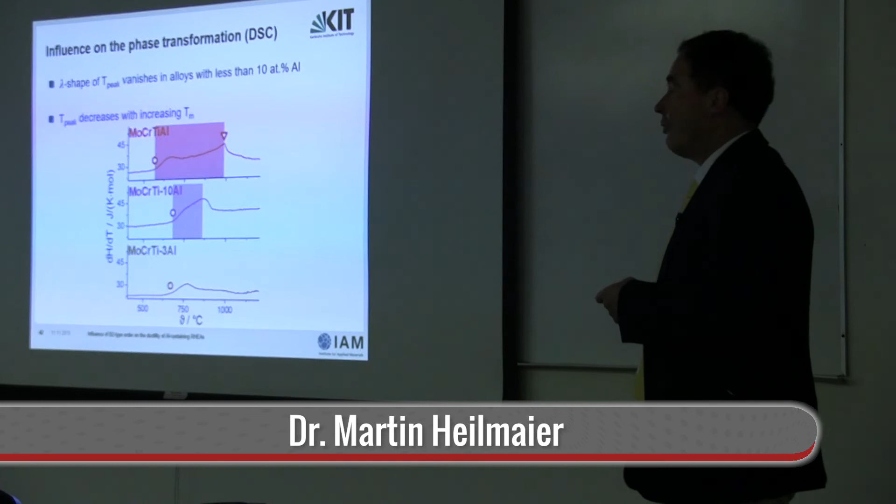And here you can hardly see it. So alloys containing lesser aluminum than the 10% should not have ordering. So this was the plot shown before.

And now, hurrah, we do have some ductility at room temperature. So the material is pretty strong. Here see the scale, 1500 megapascal. So it's as strong as a steel at room temperature, a martensitic steel, but it is still as strong as a high temperature material at high temperatures.

So the take-home message for these alloys is you have to avoid alien phases on the grain boundaries, and you have to avoid B2 ordering, at least when you talk about the matrix behavior.

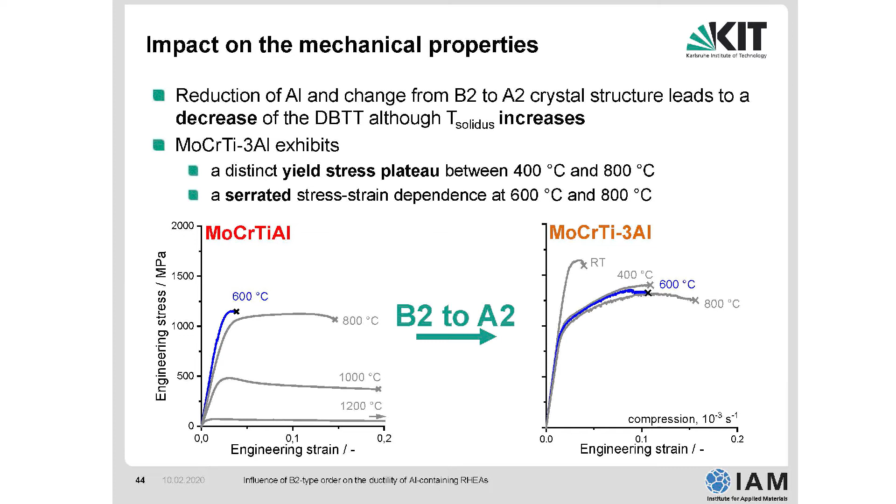The disordered A2 structure, simple BCC, can be stabilized until room temperature by reducing the aluminum content, and this gives rise to an increased ductility at these low temperatures.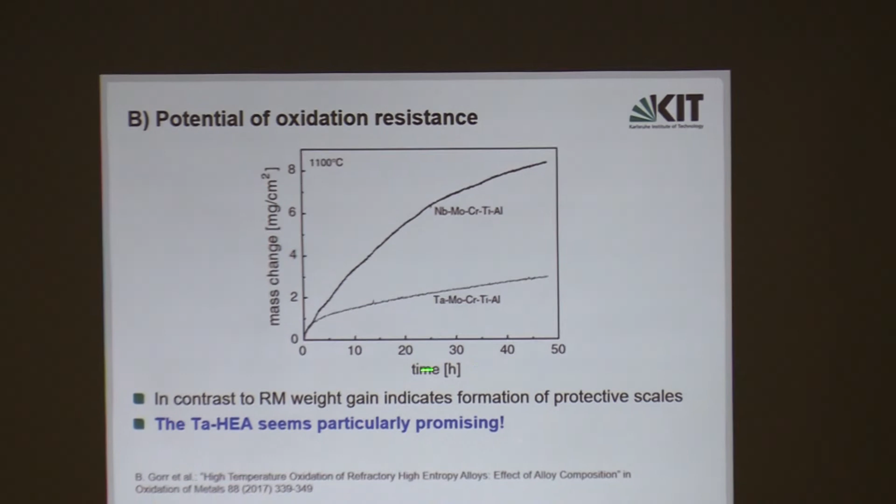This can be studied in a fundamental way by these weight gain curves. Let me go back to these weight change curves. Here, on a linear scale, you see mass change over time, but the curve looks somewhat parabolic. So in our field, we don't plot this linearly - I just wanted to show you the absolute numbers, that's why it's linear here. We plot this on a quadratic scale, so delta m squared, the mass change squared per unit area, over time linearly. Then you see that both alloys show linear behavior, which indicates a parabolic growth law, and again this is another indication that the oxide is protective.

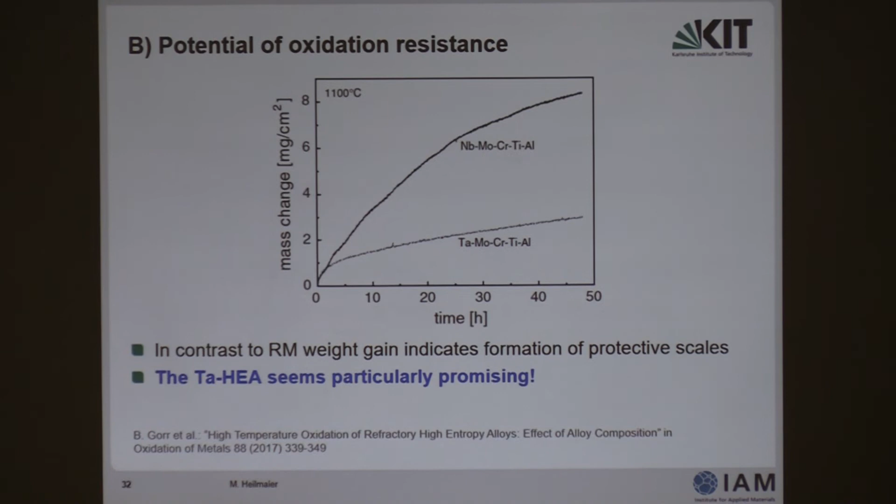You can also have much stronger increases, linearly for example. Linear oxidation would mean if I double the time, I have twice as much mass change, or in other words, twice as much metal consumption in the same time. What we need is a parabolic scale, so this should become slower and slower, and after 5,000 hours there's not much more metal consumed. So you have to check whether you have a parabolic growth law or not, and this alloy does show parabolic growth. At the moment, in this scientific community, we know only of these three elements, and some mixtures of them, which show parabolic growth at elevated temperatures. If you find another element, you can become very famous.

Thank you. Just another question regarding the applications. You mentioned that one of those is in turbines - any other applications?

Yeah, thank you. There are several more applications you can think of. Of course, it all depends on the costs - how much does the part cost being made out of this material? To be honest, I'm not looking into the costs business or cost calculations, because this is not my business. But in principle, none of these alloying elements are extremely costly. Just a side comment on this: if you look at nickel-based superalloys, they contain rhenium, and rhenium is nearly as expensive as platinum. So here there's no rhenium in there, so you can avoid the costs of rhenium.

Application-wise, we could think of, for example, turbochargers for automotive applications, because they also require very high temperatures on the exhaust side. In fact, most modern cars have a turbocharger, but the gas engines, not the diesel engines, suffer from one problem. The exhaust temperature of the gas is beyond 1100 C. That means, since these turbocharger wheels are made also out of nickel-based superalloys, they would suffer from not enough strength, so to say. They would go down in performance.

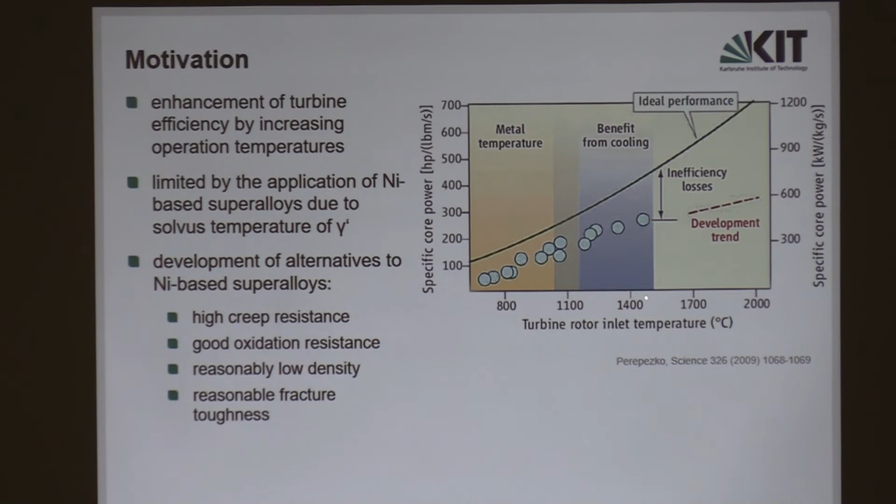So as you see here, the temperatures are much higher than the temperatures a nickel-based superalloy can withstand, right? So there must be alloys which can withstand 1400 degrees Celsius turbine rotor inlet temperature. That's the trick here. It's not the temperature the material sees, it's the turbine inlet temperature which comes out of the combustion chamber. So that does not mean that the gas at 1400 degrees Celsius would transfer all this temperature onto the material, because the material has a heat capacity and a thermal conductivity.

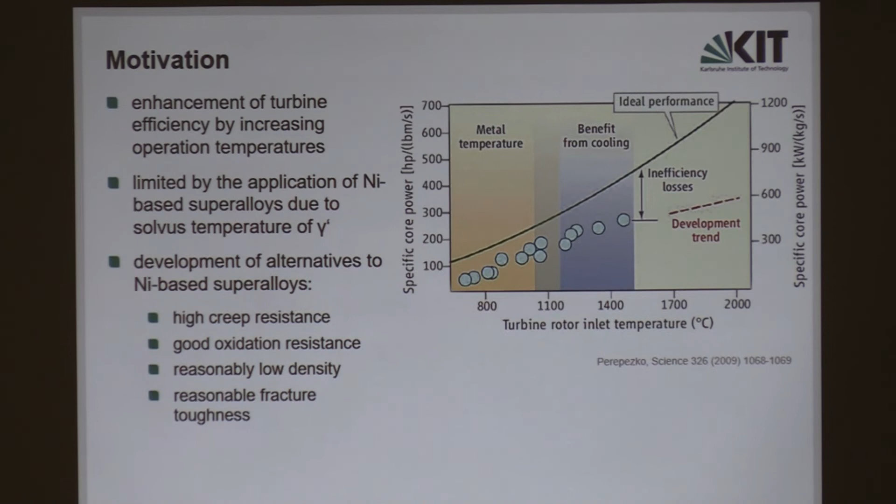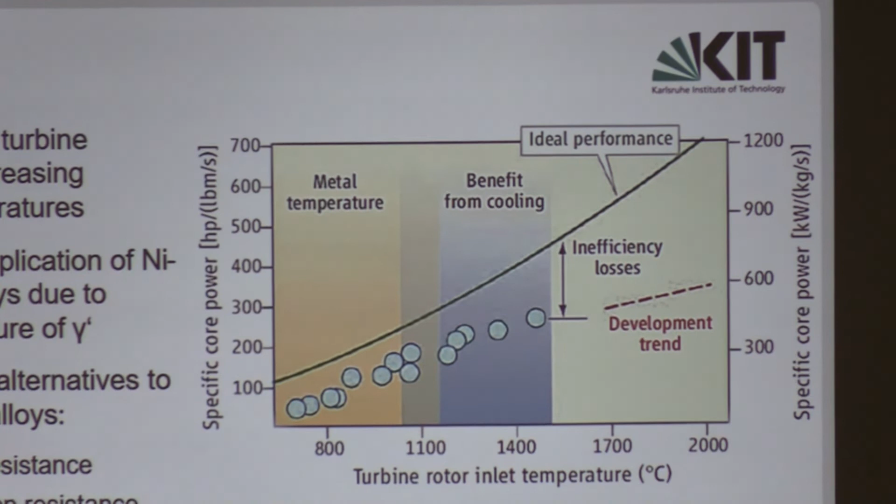So if you subject a metal to a gas which has 1400 degrees Celsius, and you let the heat go into the metal, it would conduct the heat down to the rotor and then move it away. So in fact, during operation, this material is not as hot as 1400 degrees C. It's maybe only 1100. So if you would go to 1500, and assuming we go along this straight line, we hope that with our uncooled materials we would go parallel to this line, you would benefit by at least approximately 5% of fuel efficiency when increasing the turbine inlet temperature by 100 degrees Celsius.

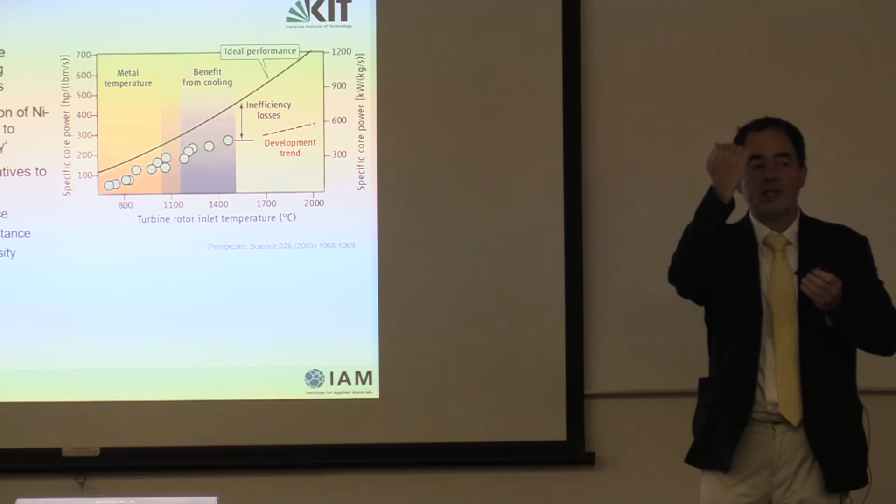And what I also did not tell is why this is deviating even more from the ideal performance. The reason is simply that for this rotor temperature, you have to apply an environmental barrier coating on the metal surface. These are no longer uncooled blades. These blades are really made in a very tricky way. They have cooling holes, they are cooled from the inside to get film cooling on the surface, and they are protected by an environmental and a thermal barrier coating.

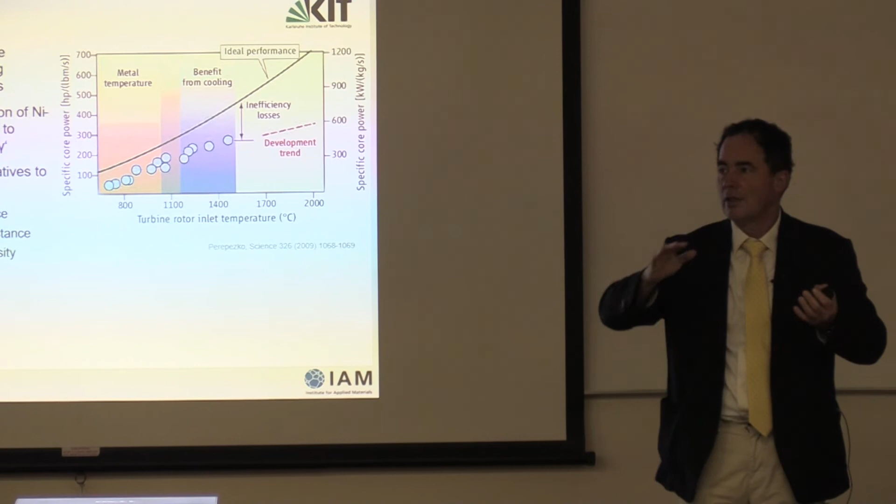The environmental barrier coating is against oxidation attack, and the thermal barrier coating reduces the temperature of the metal blade, but both come along with a disadvantage in efficiency, or with an increase in efficiency losses.

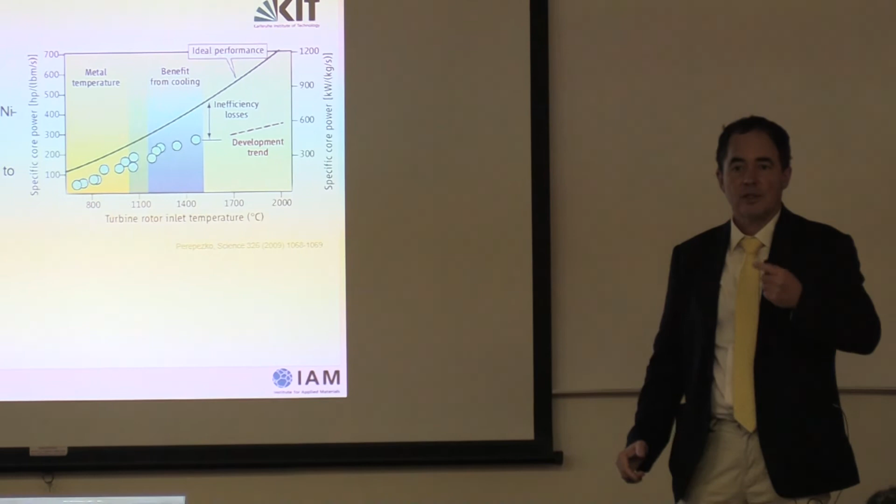That's what I did not show on this slide, but this is the reality. So the last uncooled blades were operating here at temperatures below 1100 C. So if we now can use a material which may not need an environmental or thermal barrier coating, we would jump up to about here already. And then if you can go even further, say 100 degrees higher, then you would be here. So that would be a tremendous effect on the efficiency.

However, we have not solved all the problems, I should be honest. That's the vision, right? Okay, yeah.

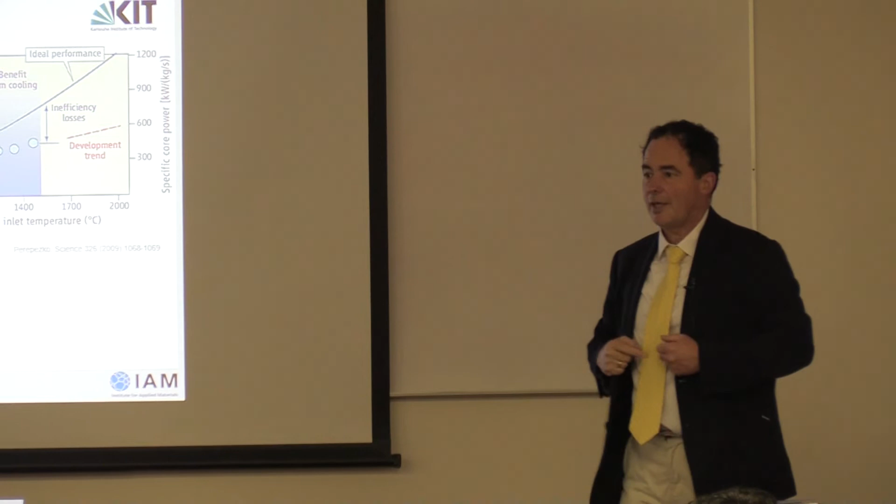Thank you, Doctor, for your talk. I was wondering if you have any insight about the atomic positions in the superlattice, or if you have used some atomistic computational methods, or tomography. I skipped that because then the presentation would have become definitely too long. What we first did was some theoretical calculations about the atomic diffraction factors of the different atomic species, which you can of course place on a corner of this unit cell or in the middle of the unit cell.

Then we have played around with different assumptions, say molybdenum and aluminum would go on one side, chromium and titanium would go on the other side, and then we mixed it around, so molybdenum, chromium on one side and aluminum and titanium on the other side. And what we found out surprisingly is that due to the diffraction factors of these atomic species, we cannot see the superlattice reflections in the X-ray diffraction diagrams. And even in the transmission electron micrographs, we see only very gentle superlattice spots, right? So it's very hard to quantitatively predict which atoms assume which lattice sites, right?

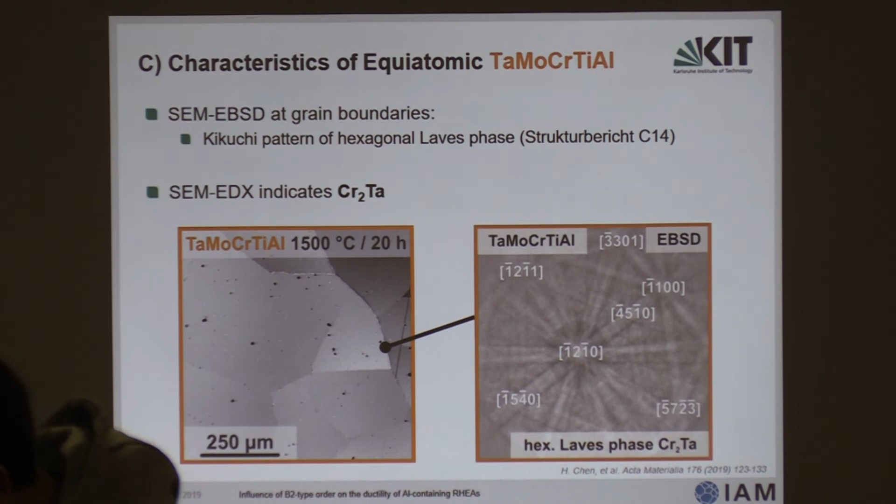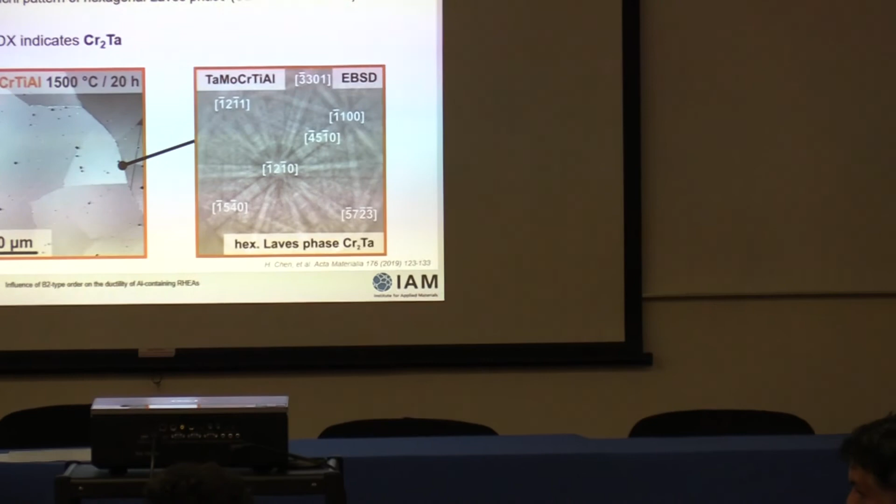Why not EXAFS analysis? We did not have the chance to use EXAFS, but that would be another option, right? So. Any more questions from the audience? Yes.

Well, thank you for your talk. My question is about the passivation layer of the alloy. As I understand, the aluminum is used to form an alumina oxide on the layer of the alloy. But my question is about the chemical composition of this oxide layer, because it is an alloy, I wonder if other oxides form on the passivation layer, and if those oxides could affect the oxidation rate of the alloy. I think of, for example, doing X-ray photoelectron spectroscopy to analyze the composition of the oxide layer. I don't know what more information can be.

You are fully right, and I tried to keep the story short because I was talking already probably too long. But in this case, what we know in this quinary alloy with the tantalum, we form, again to our surprise, a very stable oxide. Usually you form either alumina or chromia or silica with some other ingredients, but the major cationic component would be aluminum, chromium or silicon respectively. Here it's different. The tantalum plays a decisive role. Here we get a chromium tantalate, CrTaO4, a mixed oxide consisting of Cr2O3 and tantalum oxide, which seems to be the most stable oxide in this particular situation.